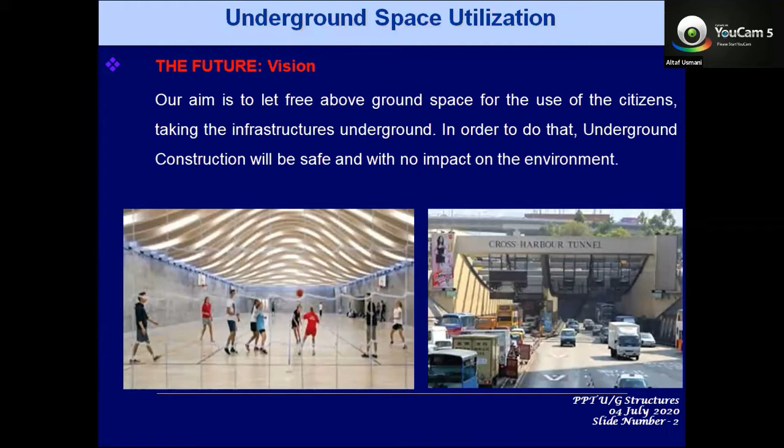What is underground space technology all about? It is about using the space below the land for development of different facilities, different tunnels, halls, everything. So using the space below the land is basically underground space technology, which is quite common in the world.

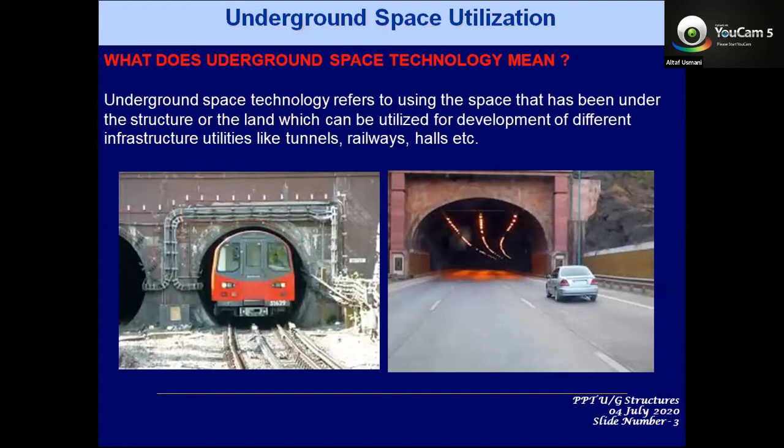This is a quite common picture. I think everybody living in the NCR region must have seen the metro. This was also quite a revolution when it started for a city like Delhi, which went from no space to very limited space, and construction started.

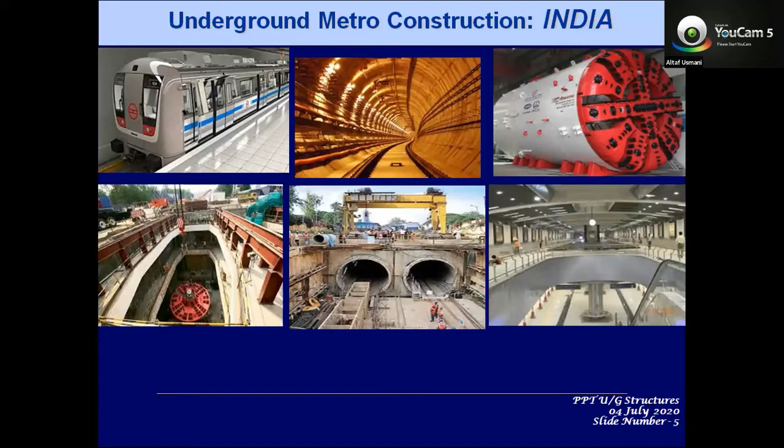So these are some of the pictures from there. This was also a good thing to start. You can see the TBM, which is normally used for constructing the tunnels. Metro construction was a good, remarkable achievement for the start of underground development.

Coming directly to our philosophy, the basis of design, or what engineering is about in underground work. The design philosophy for underground works is completely different. We follow an observational approach. Now, when I say observational approach, I mean to say that everybody does a design before anything is constructed on the ground. But in case of underground, the approach is quite different.

We also do a design before moving on to any underground structure. But this design is quite basic, and it is completely revised, or at times revised to some extent, based on the results we obtain during construction, or based on the observations we see as we move on to the construction. So this design is related to the construction. The design results are continuously updated based on the monitoring during construction, based on the observations during construction. That's why we call the design philosophy an observational design philosophy.

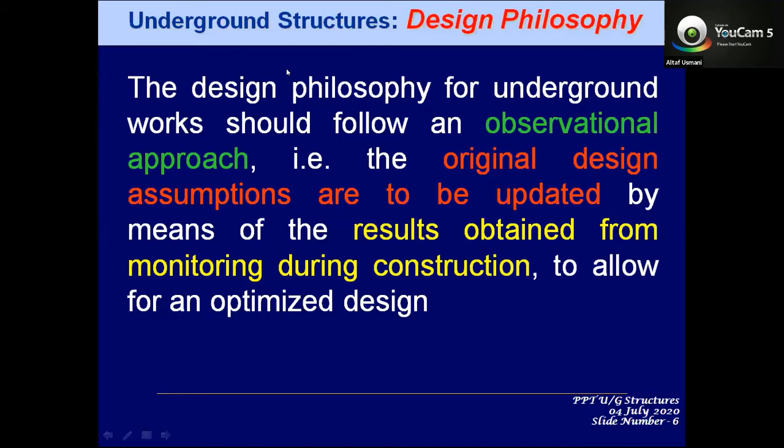Now coming to design philosophy, what is important in underground design philosophy? We are looking for 4 G's. A quite common word, but we are more concerned - we are a group of people involved in geological, geophysical, geotechnical, and geohydrological expertise. These are the four expertise normally very important in underground work. It's not that these four are the only main pillars of any underground design - we also have other civil structures, mechanical, electrical, everybody involved - but these form the key group of any underground design, of any underground construction.

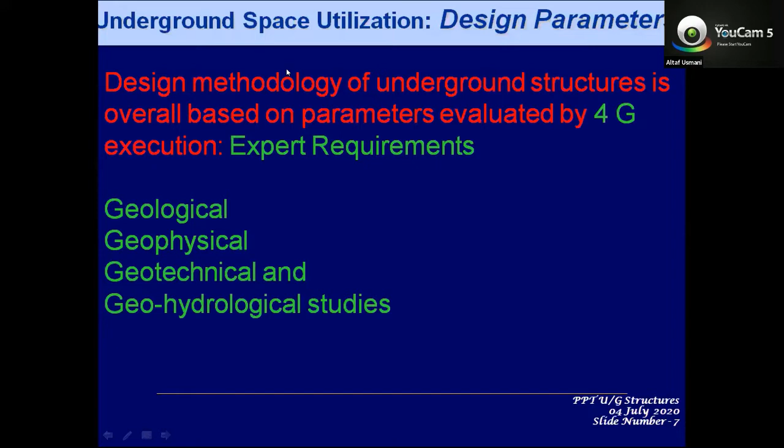These are some of the basic stages of how we move on in any underground structure. We start with some basic design, followed by some analysis - basically these are joint combinations of the two - and then the construction follow-up, which is very, very important and significant. It's not just a follow-up, it's basically a design change, a design linked to construction.

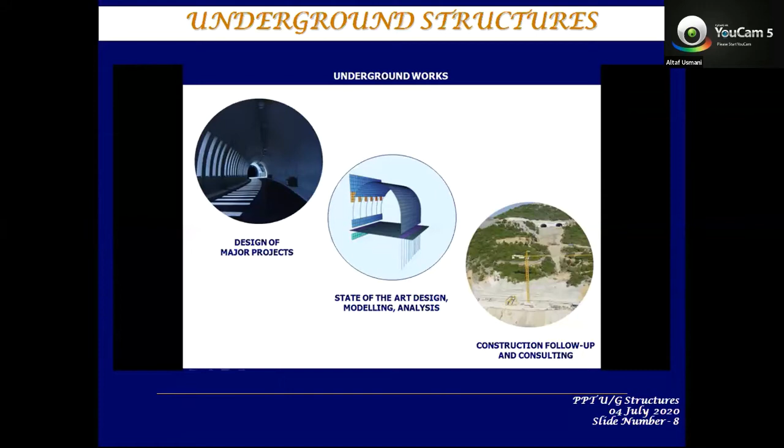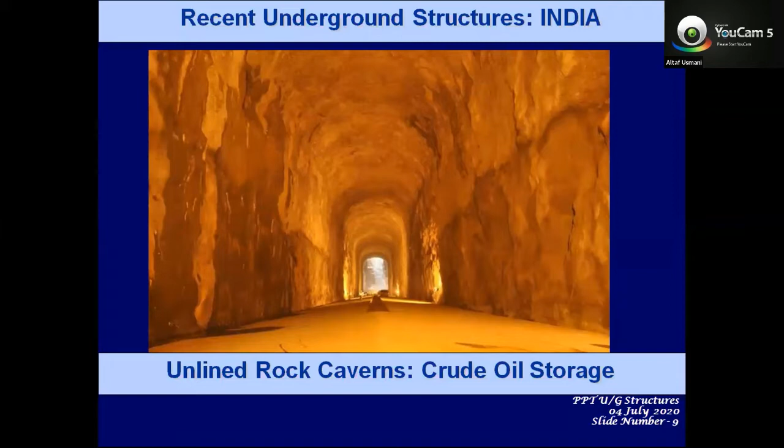Okay, coming to some recent underground structures. You can see this, a marvelous underground structure. We call it unlined rock cavern, a huge structure recently built in our country. Just to get an idea, this is almost 30-meter high, a 10-story building, and 20-meter wide, a D-shaped cavern.

Almost made out of barren rock with minimum support inside. This was one of the most challenging projects that I was involved through when I started my career. Now we have been quite deep into these designs, and we have done a lot of underground construction. We made this design, we call it a wonder in rock engineering, because normally you see tunnels which are high but not 30-meter high, not 20-meter wide, and similarly you see caverns in hydro also which are quite high and wide but not so long.

So this is almost 1 kilometer long, 1000 meter, 30-meter high and 20-meter wide. We were able to build about 2 to 3 kilometers of this underground structure with very successful design approaches. So today my concentration will be towards this design analysis and some strategies we followed.

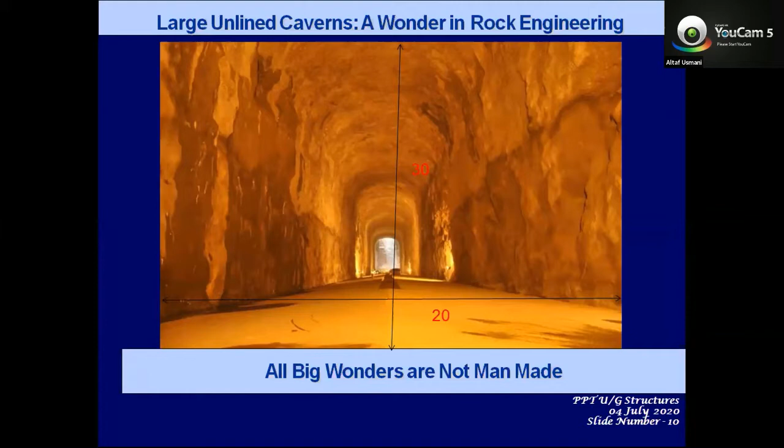What we are doing basically, this structure shown in the last slide is for storage of crude oil, LPGs and other hydrocarbons. That's why the capacity is so big. We are going to store emergency storages in these kind of structures. So how do we store and how it works?

This principle is called hydraulic confinement, where you have the oil inside this cavity, followed by the gas phase, and the most important part, the outside water pressure, which is keeping the inside things tight without any leakage. So this principle is called hydraulic confinement, where the inside pressure of the crude oil is less than the outside water pressure, and water pressure is trying to confine the oil inside. This principle is used worldwide to construct underground storage for crude oils and other hydrocarbon products.

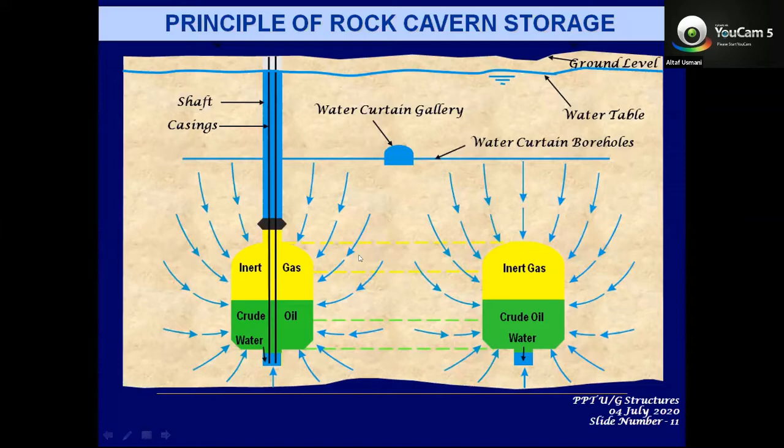We will go through the details of how this is done, but this is the concept, where the water table is at the surface, some additional artificial water is there, and you store the crude oil quite deep, 100 to 150 meters deep inside the rock, and you provide the pressure through water at the top between the caverns. The lower part is called the cavern, 30 meter high and 20 meter wide. And the upper part has small tunnels, we call water tunnels, from which water is supplied and water pressure is maintained all around using the natural permeability of the rock mass. And the pressure inside is always less than the outside pressure, which is the basic principle of hydraulic confinement.

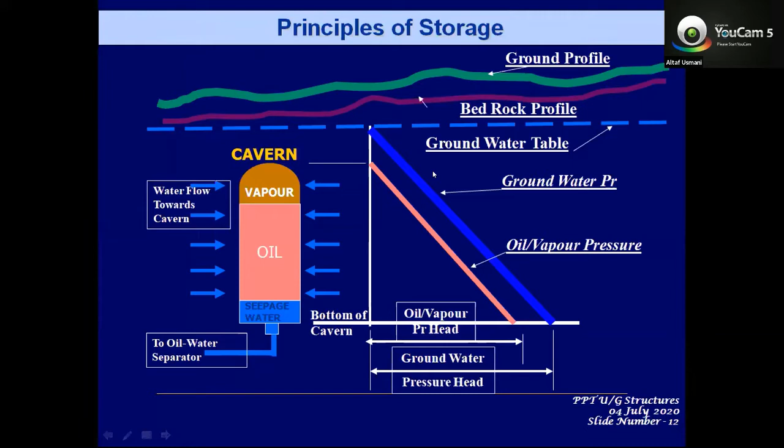Coming to the same thing, the principle in another detail. You have the oil, you have the water which is seeping and collected at the bottom, and at the top you have the vapor phase. So we are working with three phases: gaseous and liquid interface between the water and oil, and at the top there is a vapor phase. At the top we have the ground profile and groundwater table. This is built below the groundwater table, so we can take advantage of the natural groundwater pressure.

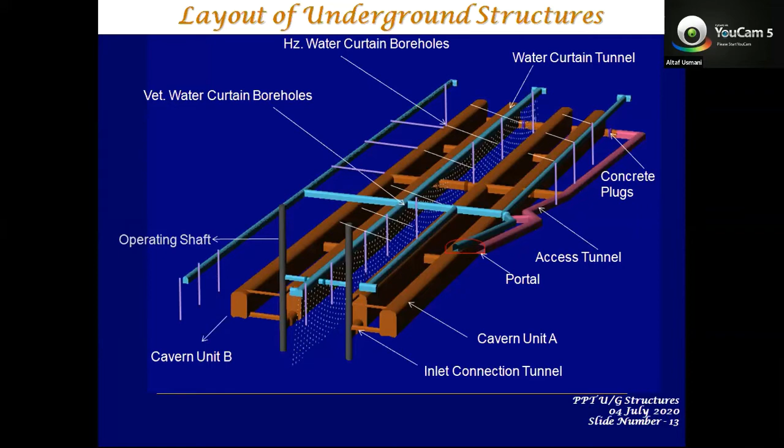Coming to some of the details of the large cavity that I showed you, this is quite large, as I told you, 28 to 30 meters high, 20 meters wide. It is quite challenging to design, to analyze, to build this. So there is a lot of analysis and engineering involved, which will be covered in how to design and do it.

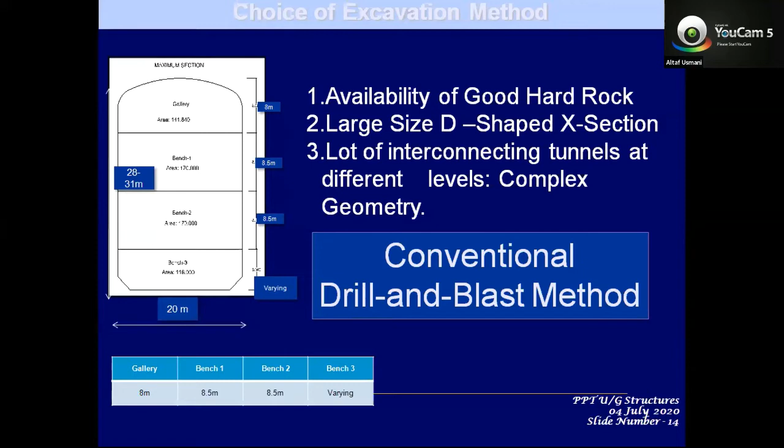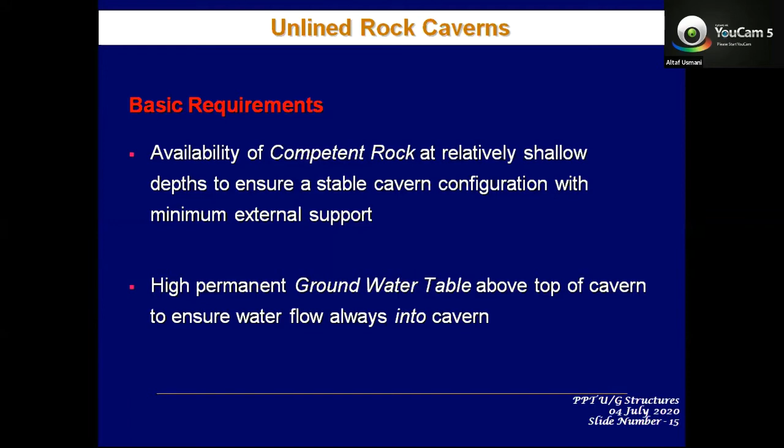Coming to basic requirements, as I told you, we are working in very good rock because we have to build a quite high, 30 meter structure. So good rock is very important, and also we are working below the water table because the principle is hydraulic confinement. So the water table is very important for these kinds of structures. It should be at a very shallow level.

These are some of the advantages, as I discussed in the beginning: surface requirement will be very low, and hazards, especially earthquake, because as you move underground, the impact of forces will reduce, and this structure is confined from all sides by the rock, which reduces the impact, plus external fire is a very important part. There is no chance of fire because there is no oxygen available inside. All the underground structure is inerted with nitrogen.

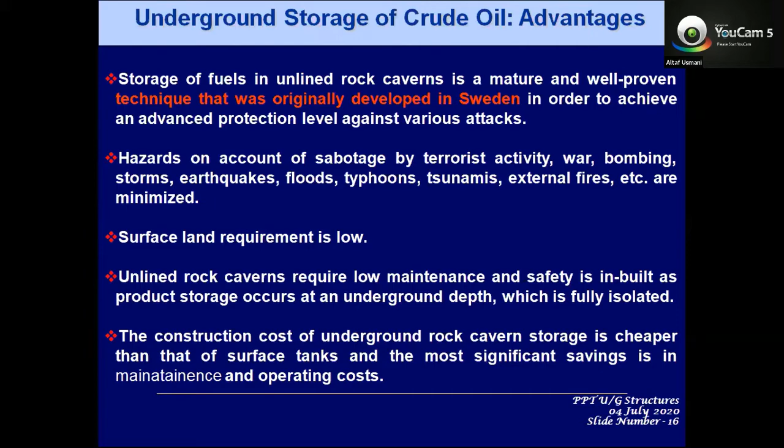Then of course the chances of explosion because of the absence of oxygen is also very low. So this is also very much safe against any war, bombing, or similar kinds of things. So these are some of the advantages which make it very significant in present conditions for different kinds of uses. Storage of crude oil is one part. We have many things that underground is going to be seen in future.

Coming to some of the details of the engineering, how we do it, what is very important. As I told you, for us a very important part is geology, because geology provides us all the input information we need to start any design, to plan anything. So geology is the first thing which provides us the basic rock characteristics, the rock types, any geological features, any geological issues, which gives us a good idea to start planning and designing such kinds of structures. And in the same way, hand in hand, there's rock engineering.

There's a rock engineering part which is very much linked with geology, where you start with, in geology most important is the drilling of the core holes which provide us the information, followed by BHTV, the borehole televiewer. These are some of the acoustic based cameras which we use to identify the geology, to identify the joints.

Then we have rock investigations, which start with field investigation, lab testing, numerical analysis, numerical modeling. These provide us 3D models in terms of geology and 3D models in terms of rock. So we have one 3D model which gives us characteristics of the ground in terms of geology, and another 3D model which gives us the characteristics of types of rock available based on the data collected. Based on these two data, the predictive geological map and the rock or geotechnical map, this is the first stage of any design to start with. These are the two inputs required to analyze and finalize the basic design of any underground structure.

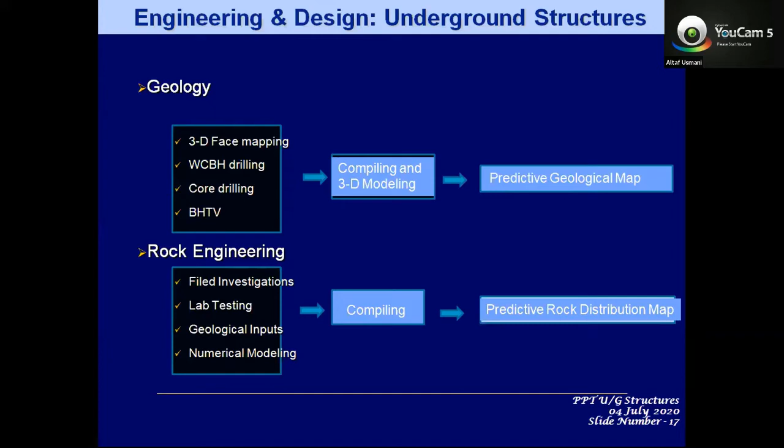These are some of the typical project stages which most projects follow, and also in any underground structure, any underground works, we start with pre-feasibility, which is basically trying to ascertain the feasibility of any new project at a specific location, followed by detailed feasibility. Pre-feasibility is more of a reconnaissance kind of survey overall, just to get a feel of the plot, the existing maps, existing structures, existing ground conditions based on existing literature.

Then we follow with detailed feasibility, which involves more investigation. Then as we move on, we further go for basic design, followed by detailed design, which is done during the construction. So the important part for any underground structure is that the detailed design is done during the construction, and of course commissioning and completion.

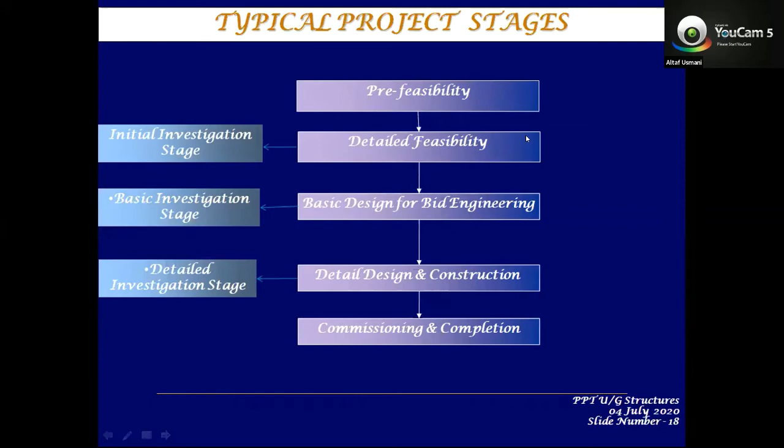Going further to different stages, as I told you, there is a DFR which is called feasibility, then BED which is basic engineering, and then detailed engineering or detailed investigations.

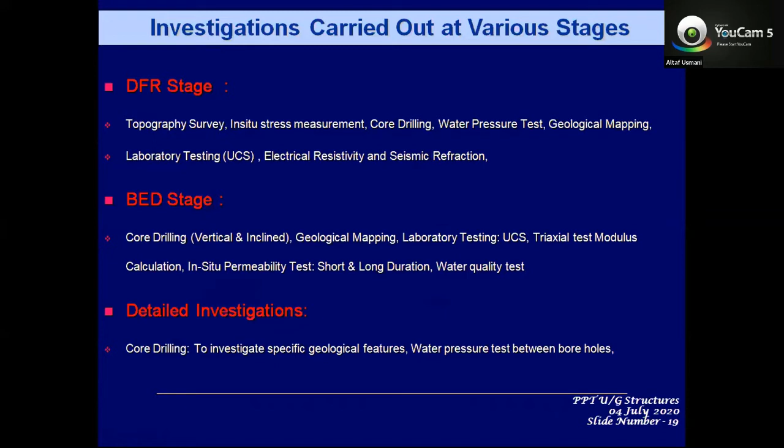These are some of the types of investigations or testing we do during feasibility, just to fix the feasibility, which involves geophysical surveys like seismic refraction and resistivity surveys, a minimum amount of mapping, and also some stress measurements, because it's very important to measure the in situ stresses in the ground at which level we are going to construct or design our underground structure. So stress measurement is a very important part in our case.

For any structure to design, we need to ascertain the in situ stresses existing in the ground at the depth we are going to plan our underground structure. We do this using a lot of methods, but most commonly hydrofracturing, which we use to identify the major horizontal stresses and also the orientation of the stresses using water pressure, for fixing the alignment of our underground structures.

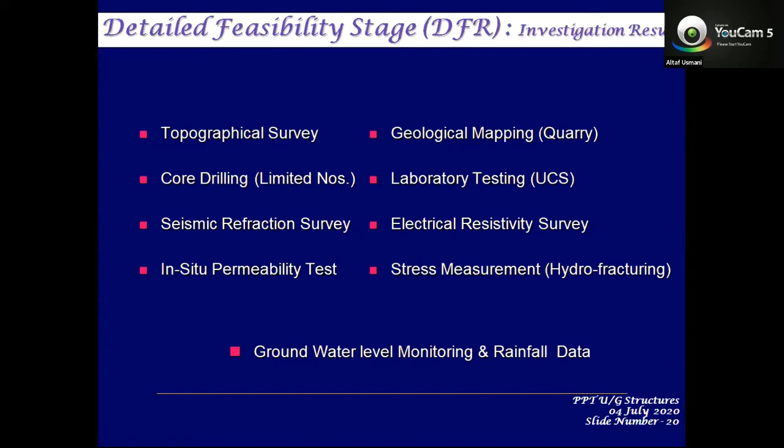Same way, we need to assess the permeability of the ground to design our structure. And then we also have geophysical surveys in terms of seismic refraction and resistivity to ascertain different rock layers and the interface of soil and rock beneath the ground.

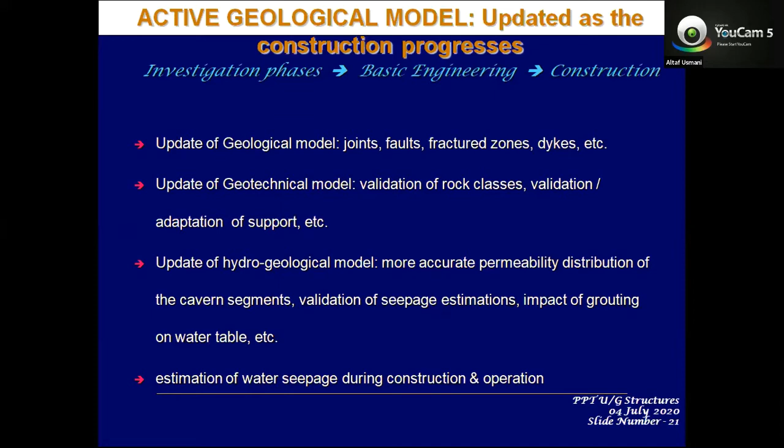Coming further, as we move on, as I told you, we make some models. I will just show you what these models are. This is a typical model at a site, a geological map of a site with investigations. So we use this map.

You can see this is what we do based on the initial investigation. We try to identify some of the features, some of the typical things which we can encounter as we are going down during the construction of the structure. So this is basically to alert - it's called an alert map, or a zonation map, where you can identify the hot spots before going to construction in an underground location. These are based on initial investigations, initial studies, initial maps.

So as we call geological map, similarly we also have a geotechnical model, a geotechnical map, which is made before starting any construction to identify areas where the ground is going to be weak, poor, fair, good, very good, or excellent. So you design, you plan, you construct, every step keeping in mind these two models. These are very important inputs for any basic design.

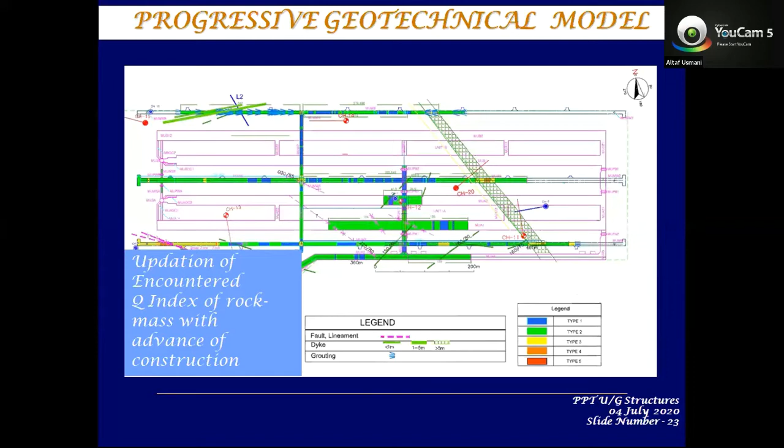So whenever a designer is starting a design for any underground structure, he has to have these two maps to plan, analyze, and design the structure in basic form. These are another picture of that design, showing how we use this. These green and red lines represent specific features which need more attention, more alertness, more caution when you design, when you construct, when you go underground.

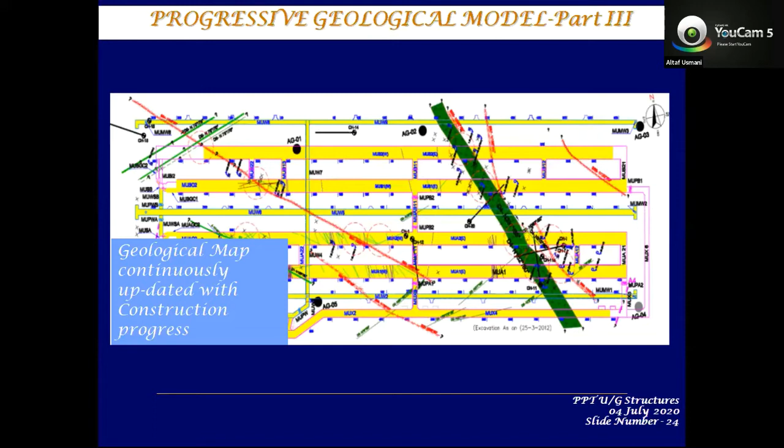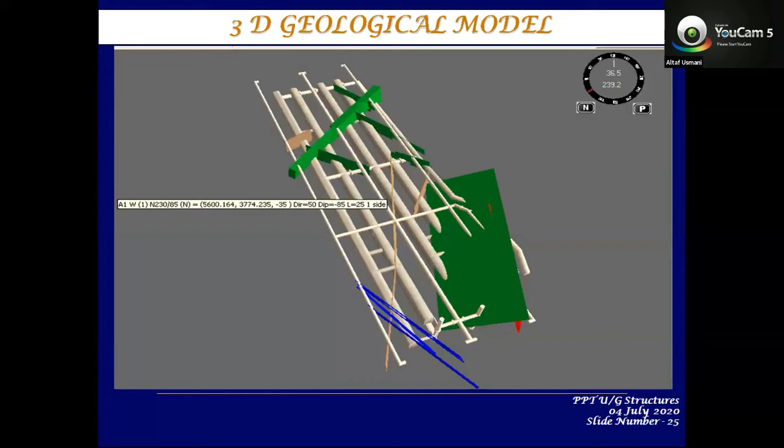This is another presentation of some joint sets, major joint sets. These are some results of a site where we identify major features, major rock types, major soil types, and the water table depth, how much rainfall is there, because this data is an input to any kind of design using the principle of hydraulic confinement. We need to know how much natural water is available through rainfall and other sources for providing the necessary hydraulic confinement.

And if the water is scarce, then we have to plan additional artificial sources of water to fulfill the requirement, to ensure the oil or product is sealed using the hydraulic confinement principle.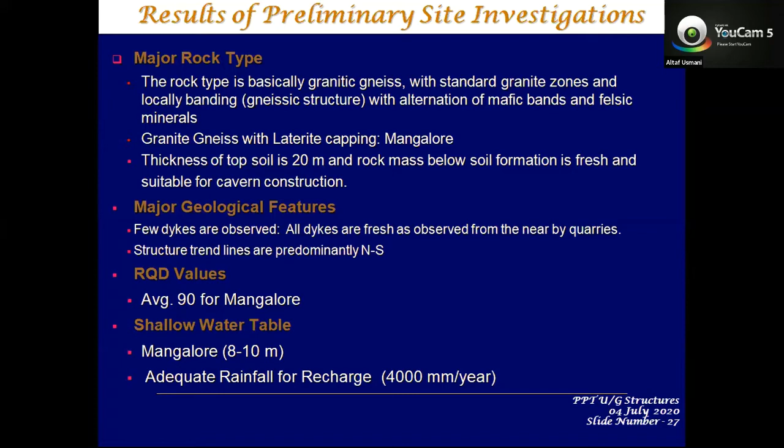So when going inside different tunnels, different caverns, you need to know what conditions you are going to encounter. This is an approximation, because once you go inside, only then can you have the real idea, the real observations. Based on the real observations, you have to update your basic rock type and your basic design. That's why I say this is an observational method of design, not a complete design done just beforehand.

So whatever we do, it's more of a dynamic design or observational design approach.

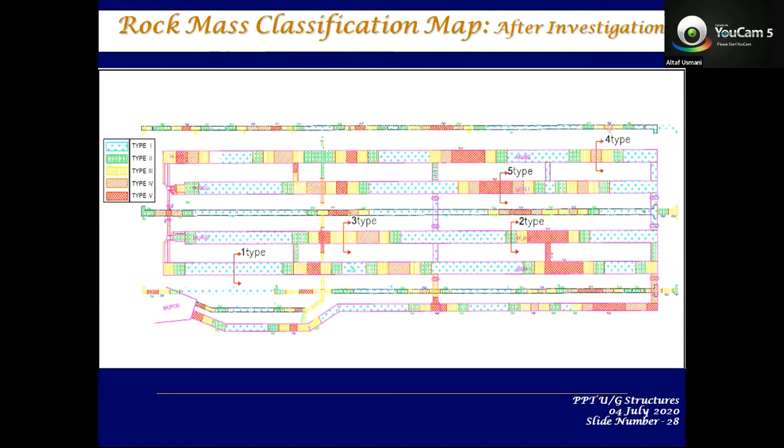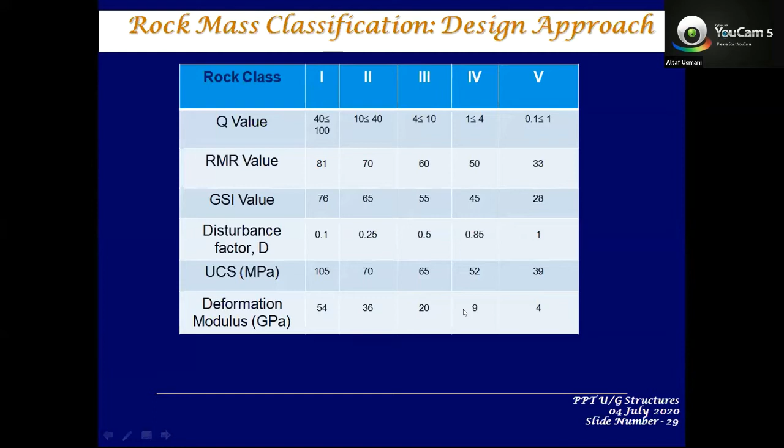Coming to some of the latest tools we have: presently the technology is moving very fast, and so are our softwares. Nowadays we have a lot of facilities to do very quick analysis, both in 2D and 3D. We don't have any limitations - either you go for continuum modeling or discontinuum modeling. You have everything available right now at your hand, on your PC, to model and analyze all that is available inside the ground.

The only thing is that these softwares are only good for you if you have good information. It is normally said about software: if you put garbage information in, you will get garbage out. So the scene should not be garbage in and garbage out.

Softwares are a tool for engineers who can use good judgment in determining the input parameters which can be put inside these softwares to get reliable, sound analysis usable for design of a structure. The basic important part is that you have to be a good engineer to do good analysis, good ground investigation, good lab results, and finally, a very important part, good judgment - an engineer who can use the values analyzed from the ground in a software to give a result usable for the design of any structure.

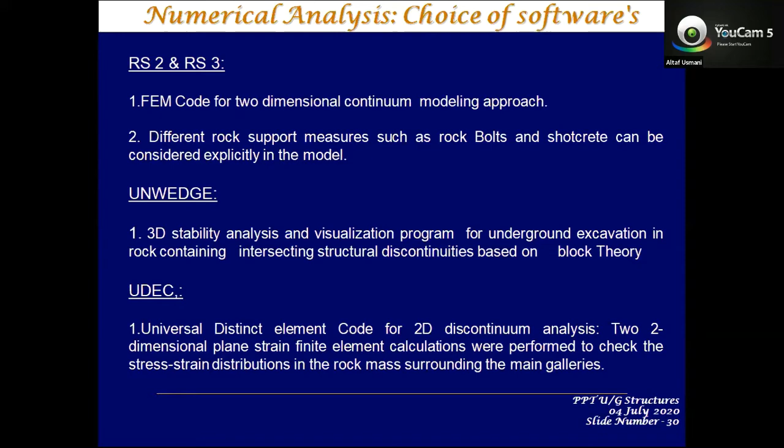The closer approach is discontinuum analysis, which gives more factual results of the field. So basically a combination of all these, followed by unwedge, which is also a very good tool to identify the wedges, the blocks underground which could be harmful while constructing excavation. These analysis tools are very significant for any underground engineer, who should have good experience using these tools, not just from the analysis point of view, but also from the input parameters point of view.

You can plan, you can design using these latest softwares, latest tools, and use this in your construction follow-up. The best part is that once you do a basic design through these tools, once you are inside construction, you again get some parameters during construction, and you can revisit the model, update it, and get the best design parameters and the best design support.

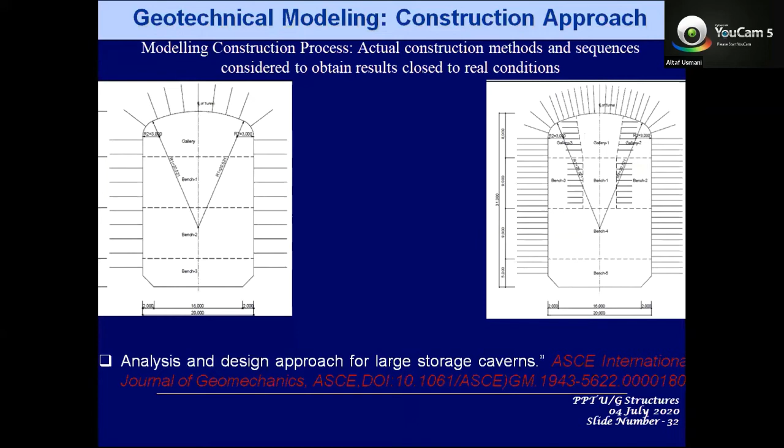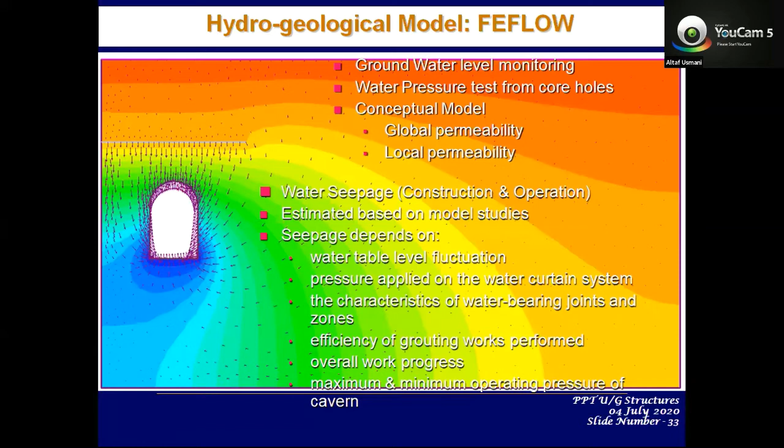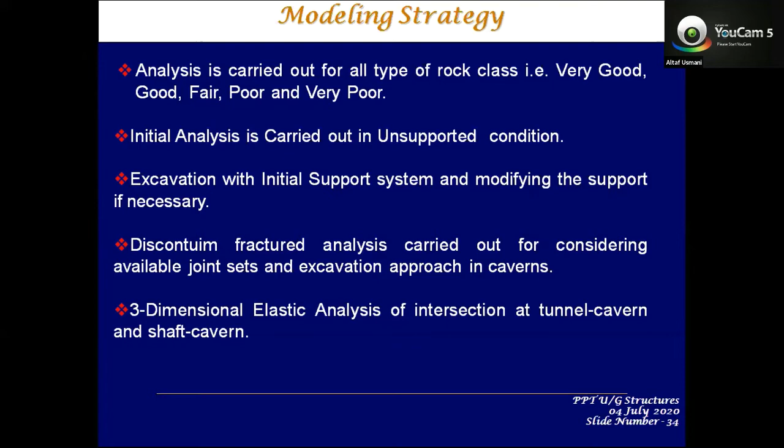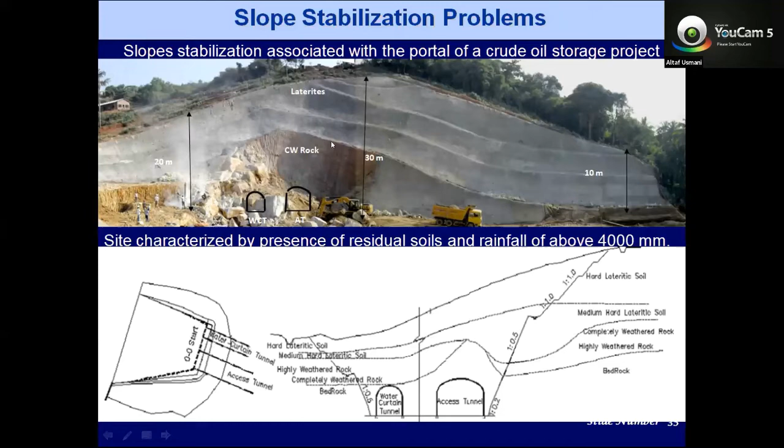Okay, this is another new technology nowadays used very much in any underground construction, a very useful thing. We call it borehole TV, BHTV, borehole televiewer. Basically this is an acoustic type of image, we have also optical based and acoustic based images. We try to develop this.

This is basically a kind of camera which is sent deep inside a hole. You can send it to a good depth, up to 100, 150, 200 meters, and you can get images inside a small hole of 100mm, 97mm, 60mm diameter. Through that you can get pictures of the rock face, and from those pictures you can identify how the rock looks, how the rock joints look. So much information can be interpreted using this instrument nowadays, which is very useful to the designers, to the analysis person.

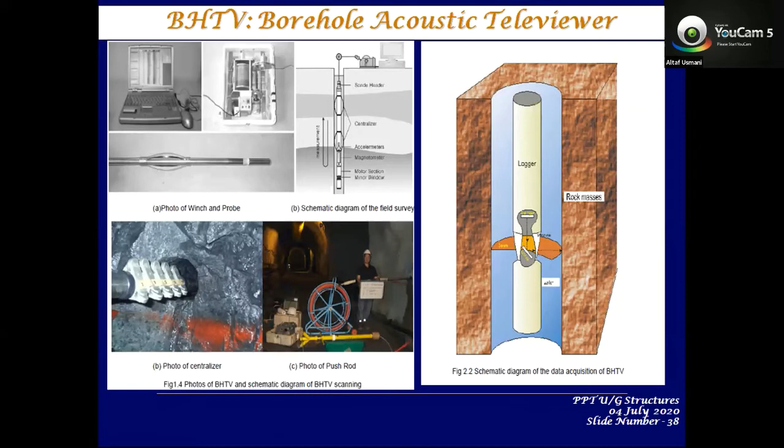So basically these are the warning signs, trouble areas marked before the start of construction, and once you are inside you have to take more precautions, because these hotspots will require some more design, some more support, some more detailed engineering analysis. You have estimated before starting construction that there could be some problems in these areas. That's why we use these tools as hotspot analysis, areas which need to be redesigned, revisited during actual construction.

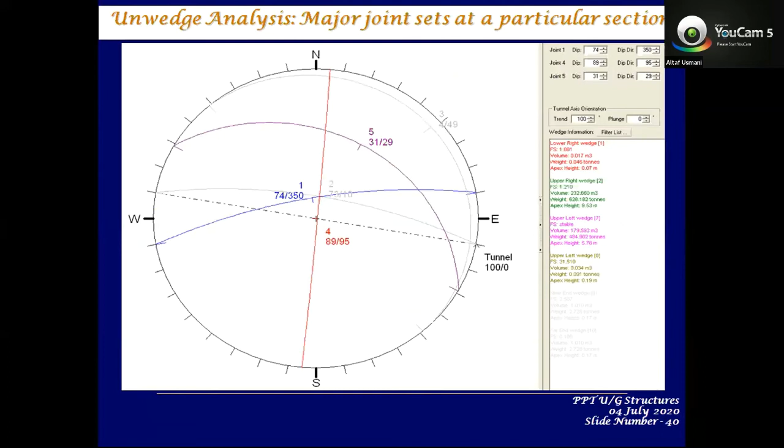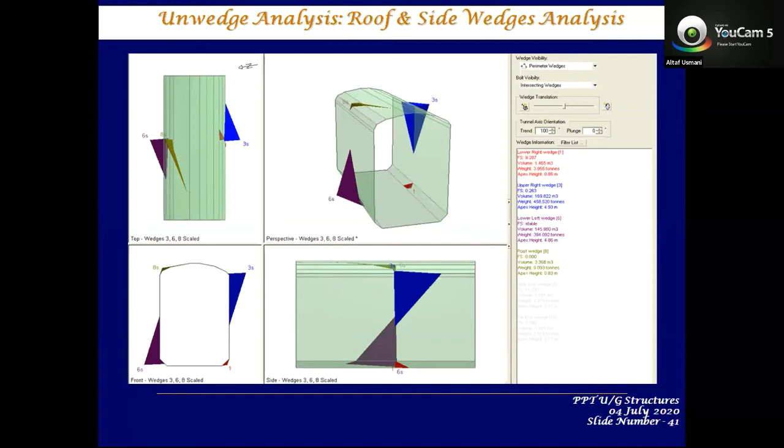These are some of the pictures of those analyses, what we do as a hotspot. So these analyses are done just before reaching that stage, 20 meters, 10 meters before that critical zone, so that we have advance information.

These are some of the blocks that are found. So as I am saying, this is good rock, but it still requires some minimum support in terms of fibercrete or shotcrete, some bolts, some grouted bolts, because we cannot leave a quite high 30-meter structure completely unsupported like that. So a minimum 50mm facial support is required for stability requirements.

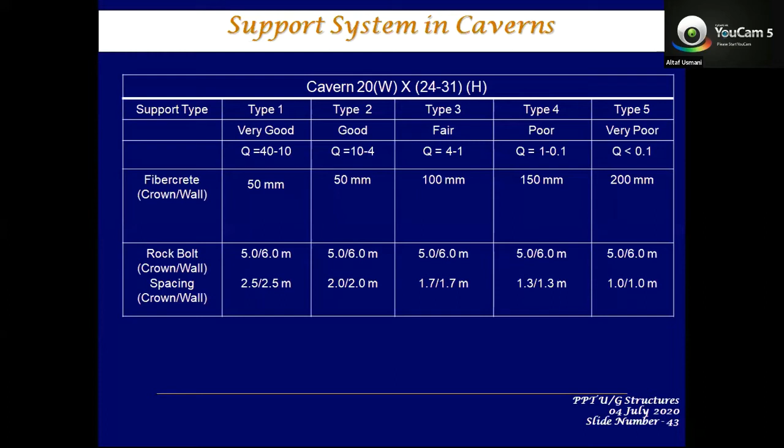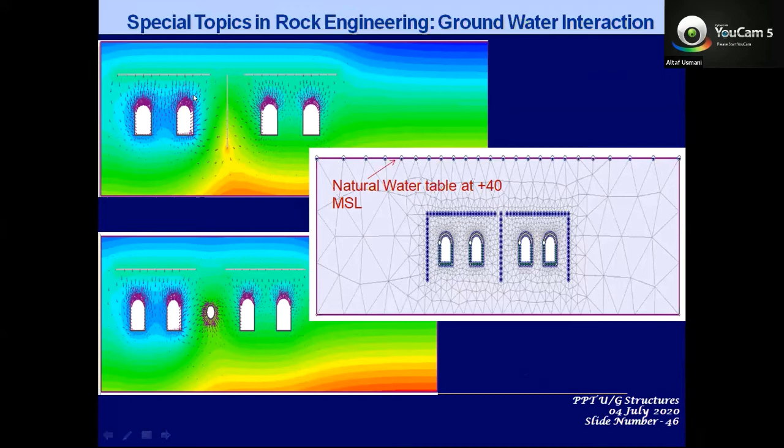These are some of the other things, same as what we do in analysis and design. Some studies related to the water table, how the water table is analyzed around the cavities, how the flow is measured.

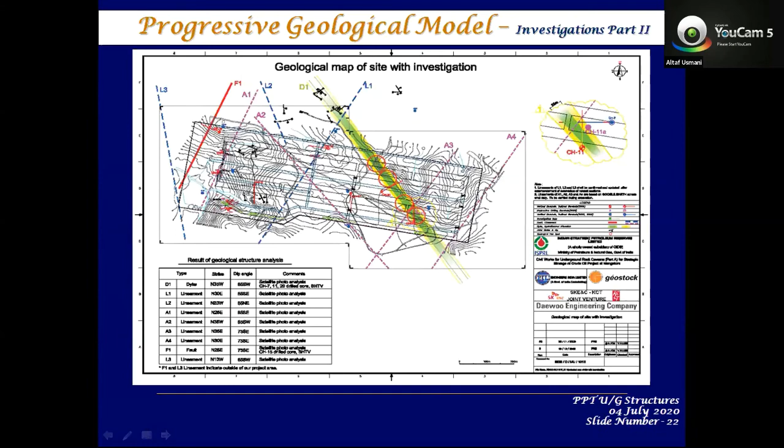Coming to another very important part... I think the slide—I just missed the slide. I will just come to it.

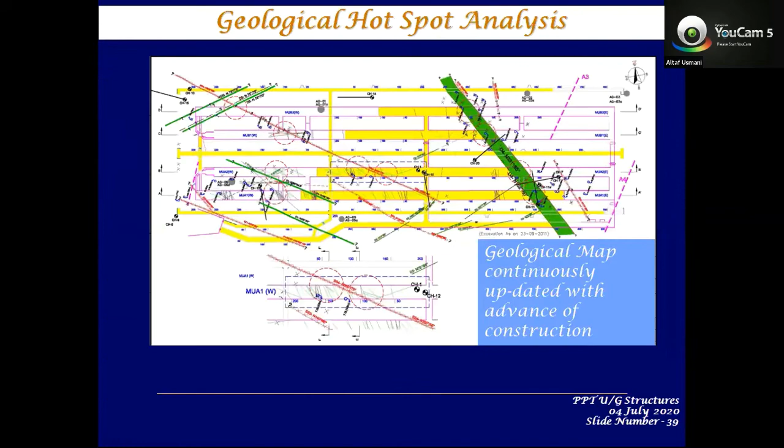So a very important part of underground engineering, or any geotechnical structure nowadays, is what we call geotechnical monitoring. Some years before, maybe 10-15 years earlier, this was not considered an important part of any project, and nobody, right from consultants to designers to contractors to clients, was paying attention to this. But many failures, many collapses, or many incidents happened in between, which led to a change in the thinking process of humans, so that monitoring has emerged as a very important area.

So what is monitoring? It's basically analyzing, observing the behavior of rock or soil during or after construction. What you are trying to do is this: while constructing something, during construction itself, you put in some instruments, some kind of measurement in terms of displacement, in terms of stresses of the actual structure, and use those results of actual deformations and actual stresses for analyzing your design, for doing your design. So this is a very important part, monitoring.

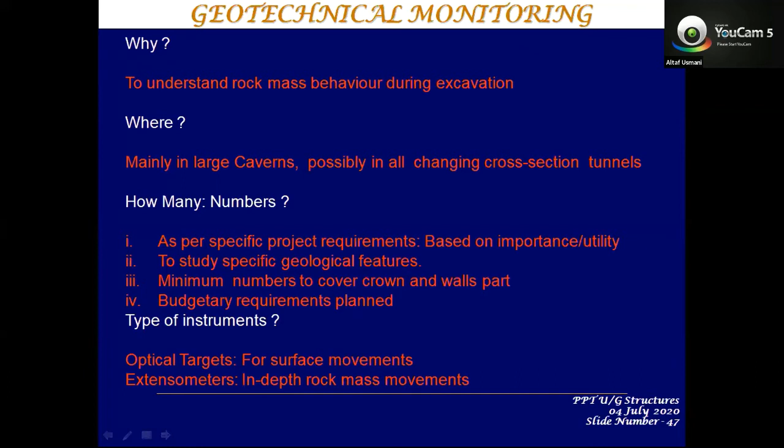So how do we do monitoring? We try to monitor what deformations, what stresses are necessary that you will get during construction, and that data—deformations, stresses—will be used for updating your design, for back analysis of your design, and also to alert yourself for any collapse, because any collapse will have a trend of large deformations, moving deformations, higher deformations. So you can get an alert using these tools. How do we do this?

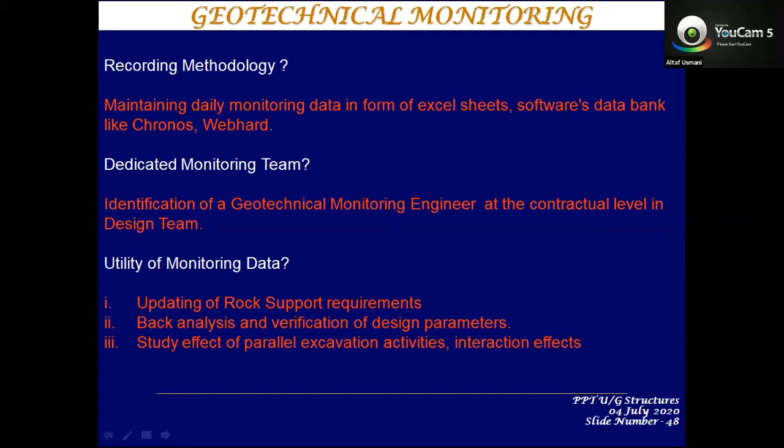You can see these are some of the instruments, optical targets, extensometers, which you put from the inside cavity into the rock, and these instruments will measure the displacements. Also some other instruments are used for stresses, and then you can get this data from the field into your computer at any time, sitting at any place in the world.

So what is happening? Your site engineer is putting this instrument and connecting it using a total station survey system, a set of cables, digital instruments, connecting it to one computer, and through that computer everybody is connected. So all the consultants, clients, engineers sitting across the world can see the actual behavior, actual data at the same time on their PC.

What is happening 200 kilometers, 300 kilometers, 1000 kilometers away in the ground? How is the ground behaving, just at the look of his PC? So this is the purpose of monitoring. You monitor, you understand the behavior of the structure.

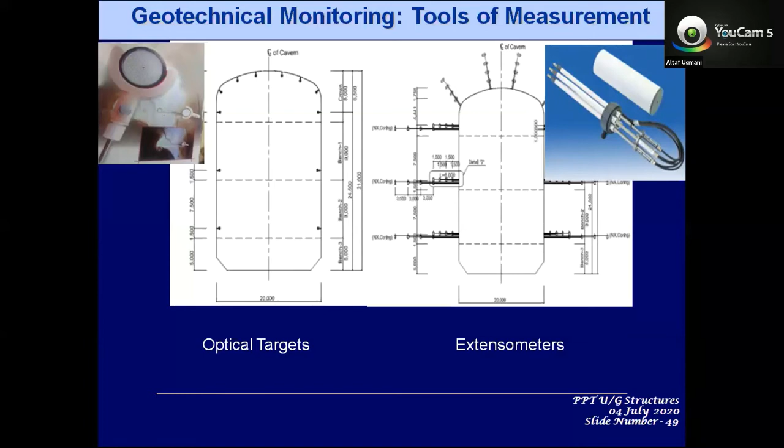So monitoring is basically observing the structure, trying to identify its failure, trying to identify what else is required to prevent any collapse.

And what you do is collect the data in terms of graphs, and these graphs are developed for the complete life cycle of the structure, the complete construction cycle. And we can see if the trend is stable, or if there is high movement of displacement, where you can say there is some trouble because the deformations are increasing.

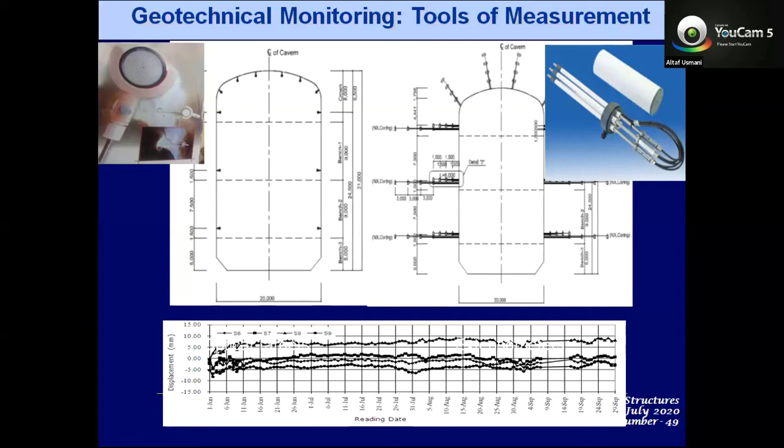So it's a tool for an engineer to reanalyze, to redesign whatever parameters he has adopted in the basic engineering.

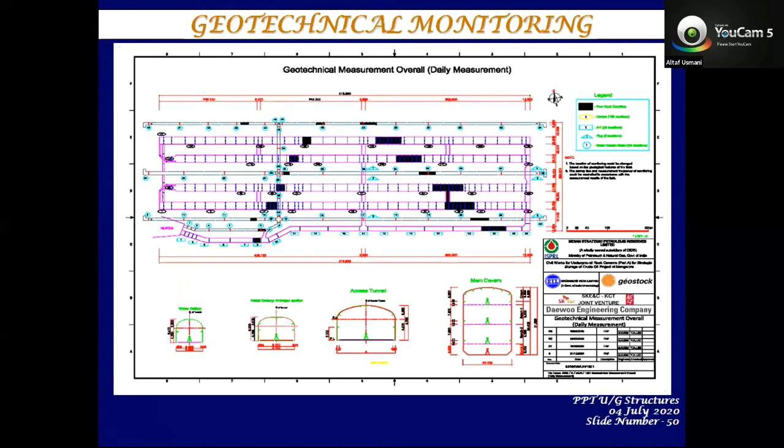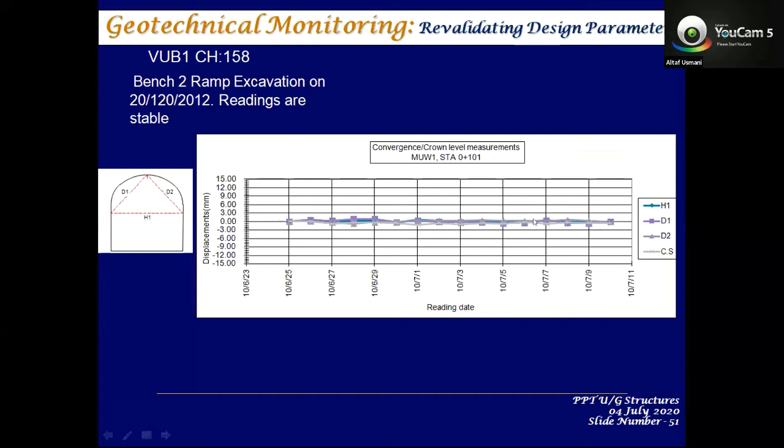These are some of what we see as a layout, how to provide it. We provide different kinds of instrumentation all along. So these are some of the tools. This is the data, typical data collected during the life of the structure, how deformations move, displacements happening in the X, Y, Z directions.

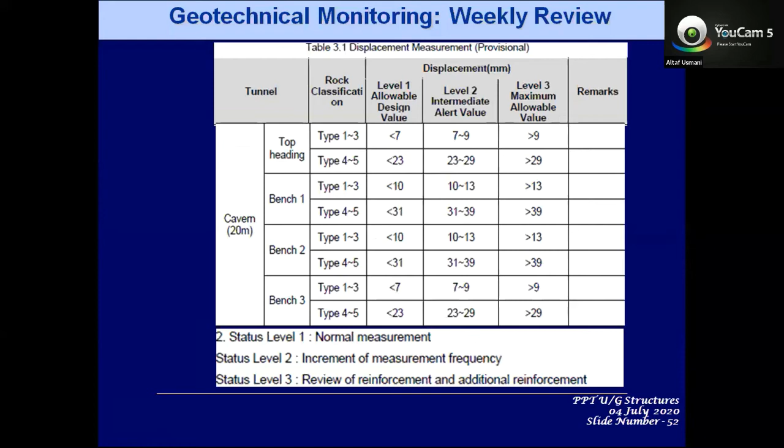These are some of the values, what should be the value, how much displacement is allowed, how much stress is allowed. So we fix the value, and then we do a study of what should be the permissible values and when you have to revisit the structure or construction design.

And also a very important part nowadays is back analysis. So what is back analysis? Analysis is what you do at the start of any project. You analyze, you design, you start the construction.

Once you are inside the construction, you observe, you see, you measure deformations. Those deformations are sent back to the designer, to the numerical analysis software. Initially you use, suppose, a modulus, the strength of the rock, to ascertain the deformations. Now you are ascertaining the deformation in the field and back analyzing the modulus.

So basically it's trying to see if the modulus you selected at the start really matches the deformations occurring in the field. So that we call the back analysis tool, a very important tool for engineers.

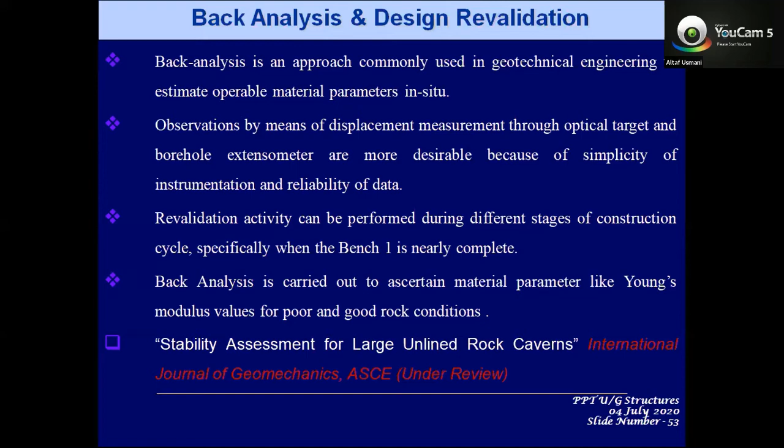So these details were also published in many papers. You can see these papers as well.

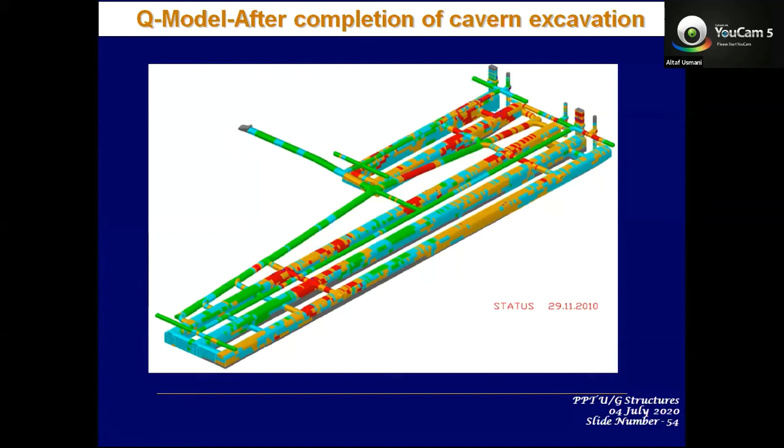So another very important area nowadays for every field, including civil engineering, including underground engineering, is that as the chances and frequency of collapse increase, this subject has also grown in importance.

This is a very important part where what you do is try to understand what risks are involved in terms of consequences, in terms of rating, in terms of classes, in terms of accidents. So there is a complete study, just to get a feel, that underground risk is very important.

We define a risk, we analyze a risk, we determine how the risk will be interpreted, how the risk will be solved. So we classify according to catastrophic, critical, marginal, negligible.

And then, based on the injury, based on the accidents, based on the loss of time, you classify frequent, remote, occasional, and also classify who is responsible for this risk, who will pay the money, who will take the responsibility. So these are all designed and fixed as part of risk management, which is a very important tool for underground engineering nowadays.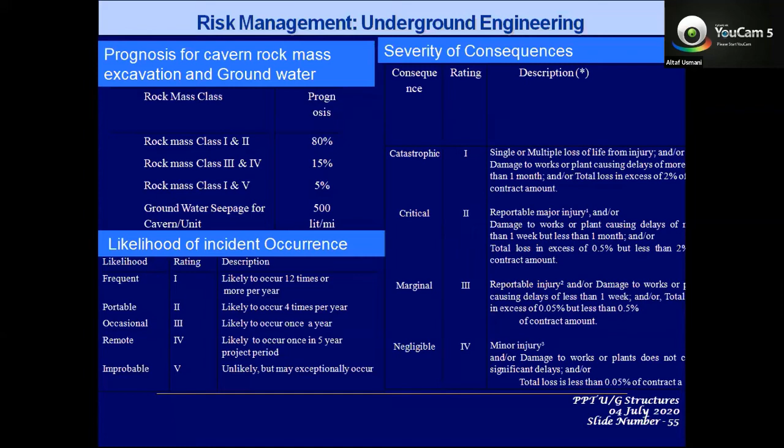Now coming to some of the challenges, some of the issues, just to wrap things up. We are working with very, very large excavations nowadays - what you will see in some more time, 60-meter wide, 40-meter wide, maybe 40-meter high. So our zeal to go big and big, trying to make bigger excavations means more challenges, more data. That is what we call an observational method of engineering.

That is the basic thing what we are developing nowadays. So these challenges are from little experience, investigation, data - a very significant part. Whenever you are starting a project, the client, everyone is in a hurry to start. You don't have the time to do investigations, to collect data. The less data you collect, the more risk, the more danger you are going to have. So risk management starts with investigation.

Then you are also encountering various kinds of problems during construction. However much experience you have, the enemy is your underground nature. You cannot completely model, you cannot completely analyze what is there inside. You can only estimate, you can have some prognosis, you can have only approximations. The actual is whatever you encounter inside, and that could affect you - the time, the planning.

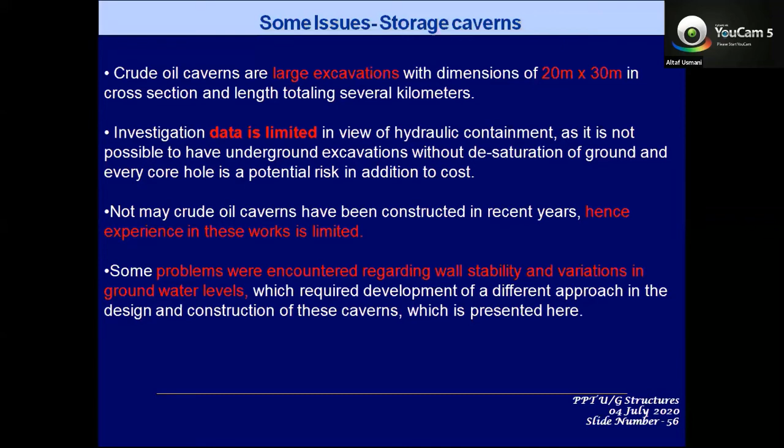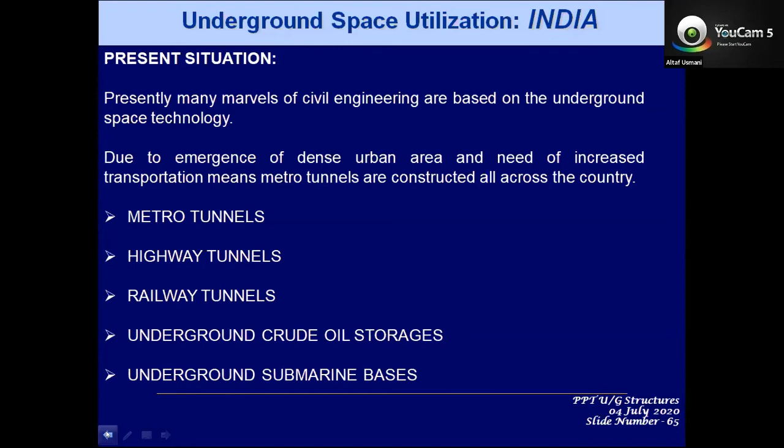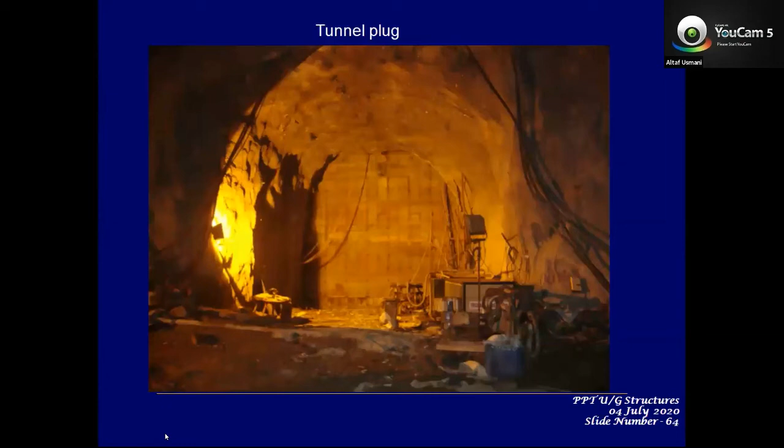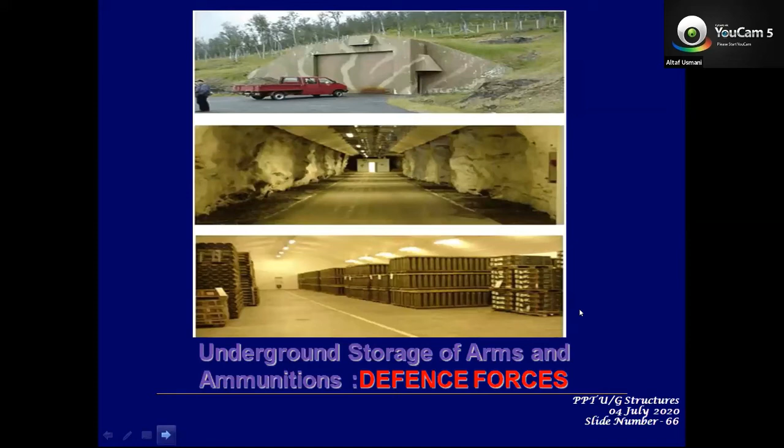So in future, below the sea, metro lines, new tunnels are coming up. We are also in the way of high-speed metro tunnels, high-speed trains, which are also going below the sea. So these are some new technologies where you will encounter all the knowledge of underground engineering, which is a new challenging thing and a very interesting thing also.

So these are some pictures which are already being put into active mode by different agencies. You can also see something called nuclear waste repositories - you are developing a lot of nuclear waste, so where to put that waste? People are thinking of developing underground structures for putting that nuclear waste. Similarly, you can have arms depots, control centers - everything underground, which can be seen coming in the future.

You can have these kinds of structures being developed somewhere, where these underground facilities will be used for every purpose, from defense to state to command centers. So these are very important parts of our life. Underground is a significant part because of the scarcity of land - you have to move underground. So underground gives us many advantages.

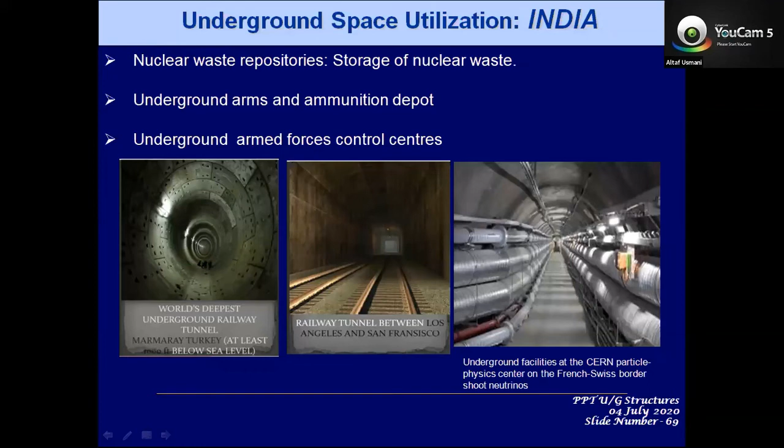You cannot ensure - okay, coming back to the last thing, the future is underground. This slide shows the tunnel, two tunnels, and the slope, which is the only access available. This is a very important part of the start - once you have a good start, you have a good finish. And just to conclude, the future is underground, and all of you, whether from the same underground field or different areas, should try more. Thank you.

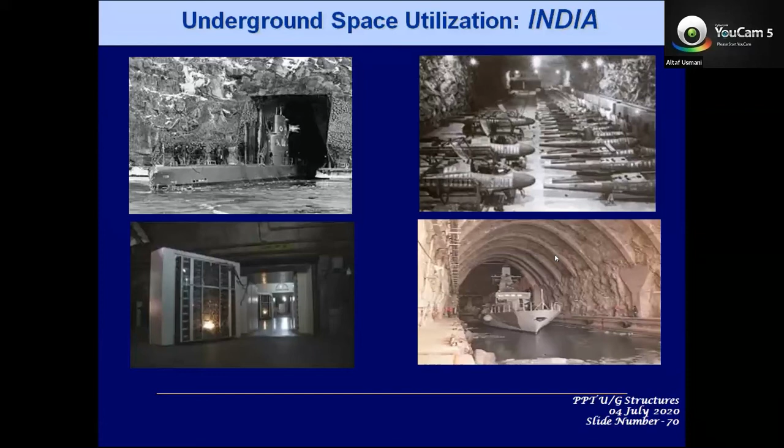So the question is, are caverns always below the water table? These caverns are used to store hydrocarbons, and the basic principle is hydraulic confinement, which means water has to be around these to prevent any leakage. So the water table has to always be above the caverns. You cannot build the caverns without water; the water table has to be above the caverns always.